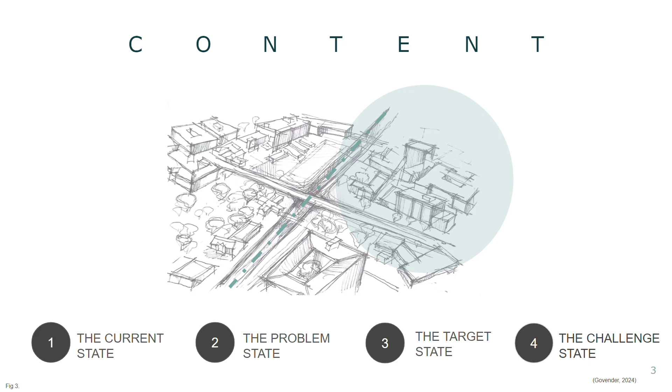The presentation is split into 4 themes, looking at the current state, problem state, target state, and the challenge state. In the current state, we will look into the issues that exist in this mostly privatized Hatfield. Our focus area will be Hatfield, one of the suburbs of Pretoria.

Currently, Hatfield resembles a disconnected concrete desert, where water is heavily privatized and scarce. The Gautrain running through the center facilitates the constant flow of people in and out, connecting Hatfield to Gauteng. However, its full potential remains untapped, leaving Hatfield seasonal with Gautrain's location remaining unoptimized.

In Hatfield, our concept of river of stories encapsulates the diverse narratives stemming from the city's population, rich history, and culture. Here, a multitude of individuals coexist, ranging from students and business people to street vendors and car guards. However, families are notably absent in Hatfield, primarily residing in suburban areas outside the city center.

Access to water is difficult. In the case of a student from Johannesburg coming to Hatfield, water would only be available to them at home or university, with no other public access along their journey.

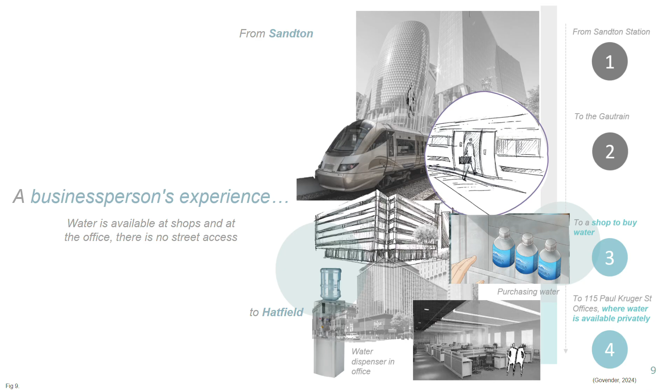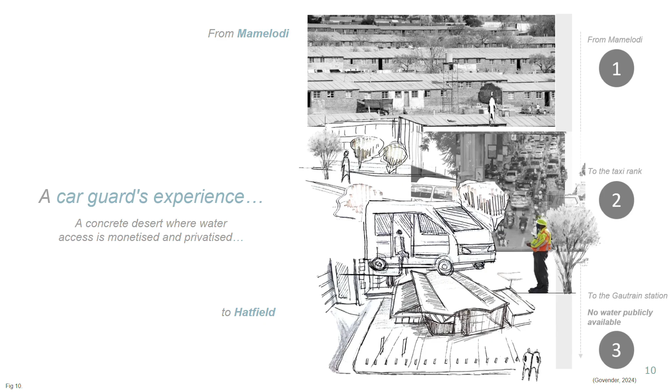Along a business person's commute, water is accessible only in shops or at private offices. From the perspective of a car guard and his journey from Mamelodi to Hatfield, water is not accessible at any point. Hatfield is an urban desert where water access is monetized and privatized.

In its current state, Hatfield is characterized by transportation infrastructure that divides the city, primarily through roads and railways. Lacking pedestrian friendliness, it resembles a concrete jungle and water desert. Our challenge is clear: how can we reshape Hatfield from a fragmented, concrete and water-scarce environment into a sustainable, walkable and interconnected city with water as the central catalyst for transformation?

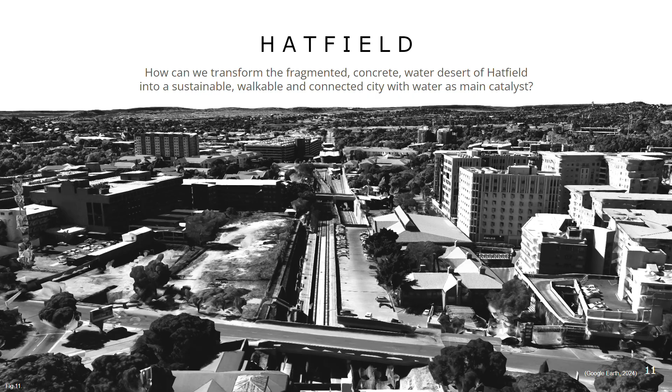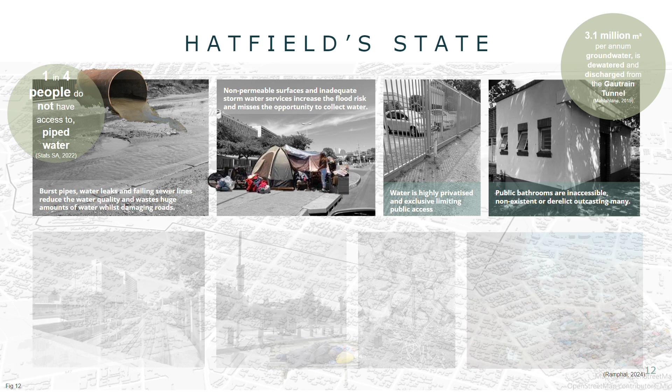In South Africa, 1 in 4 people do not have access to piped water, highlighting the national emergency. In Hatfield, non-permeability and poor maintenance put strain on stormwater systems, whilst water and sanitation spaces are privatized, inaccessible, and exclusive.

Public space does not exist in the site, and a lack of public pride leads to degraded infrastructure and polluted water. Clean municipal water is used excessively for landscaping.

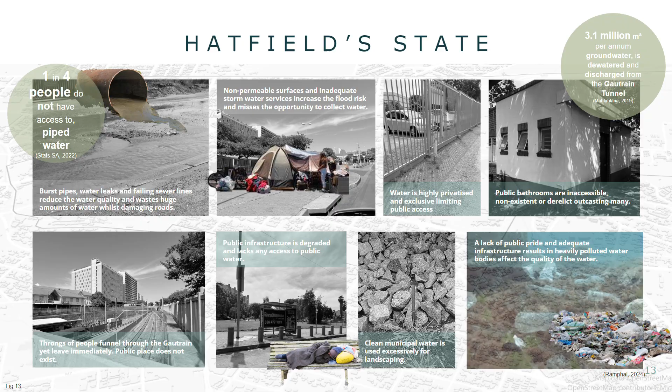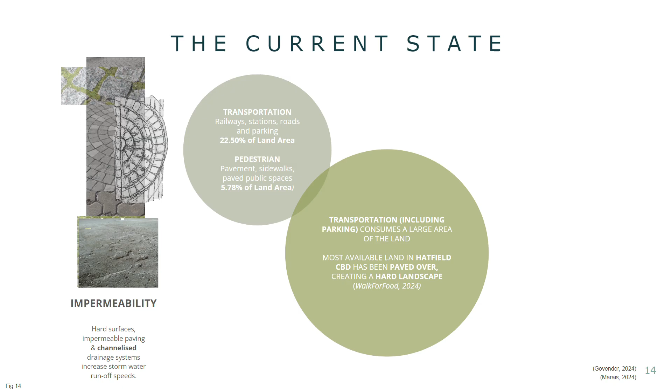In Hatfield, a significant observation is impermeability, characterized by hard surfaces, impermeable paving, and channelized drainage systems that accelerate stormwater runoff. Approximately 22.5% of Hatfield's land area is covered by transportation networks, with an additional 5.78% of hardscaped pedestrian network, totaling in nearly 30% of Hatfield as hardscaped surfaces.

Only 1/3 of all mapped water points were found to be potable. There is no convenient street access to facilities such as drinking fountains and public toilets. Additionally, municipal taps are frequently locked or unusable. This neglect of basic amenities raises concerns about the unmet needs of the general public in Hatfield.

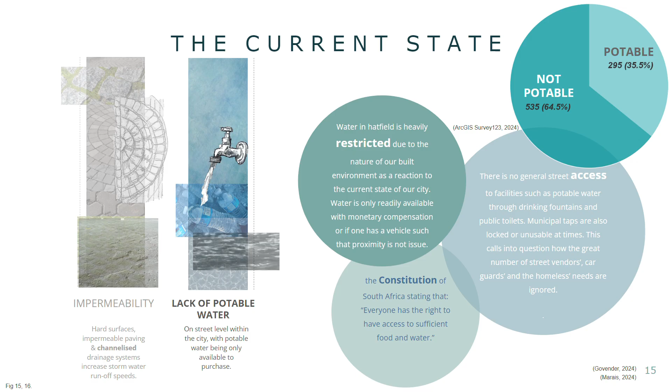Water in the linear industrial system is commodified, losing value as it flows through. Once used, its value declines instantly, as seen from reservoirs to taps or sprinklers.

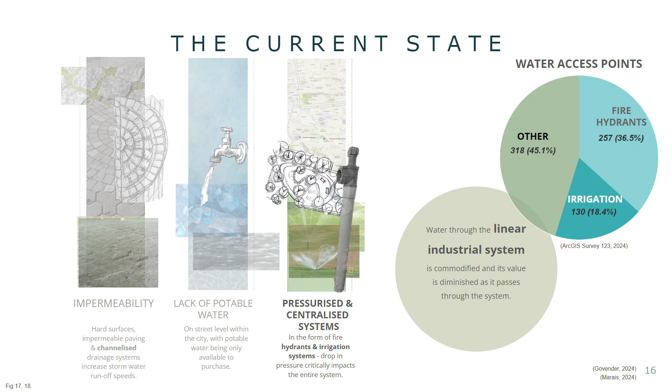Over half of water access points in our data are fire hydrants and irrigation, revealing a lack of prioritization for people's water needs. The lack of accessible water sources has forced reliance on unsafe options like rivers, perpetuating pollution and posing health risks. With 58% of water points being difficult to access and global warming exacerbating demand due to high temperatures, urgent action is needed to address this pressing issue.

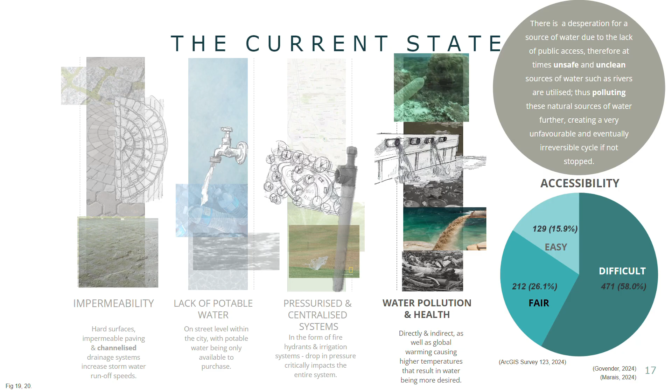Water is a privatized affair, used for own personal demands and desires without much consideration for the system as a whole, as it is only considered by users as it enters, sits on their plots and leaves.

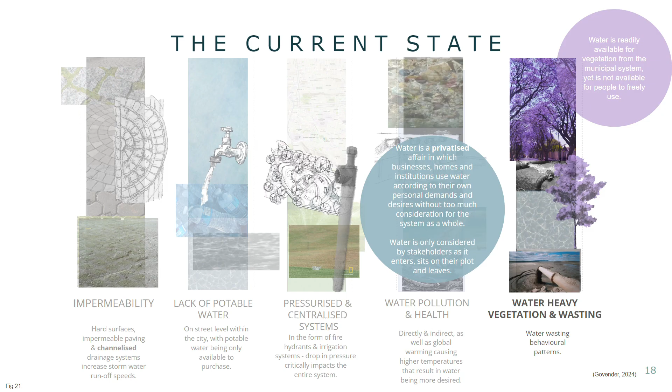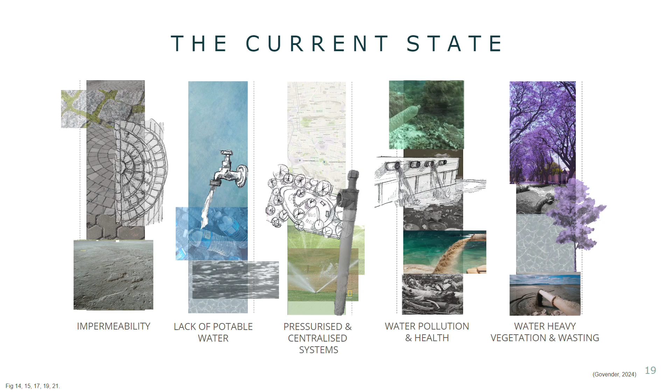Water is readily available for vegetation from the municipal system, yet is not available for the public to use. The issue of water currently reduces the quality of life. Without water, there is nothing. And along with changing climates that make water more scarce, we need to start tackling the problem seriously.

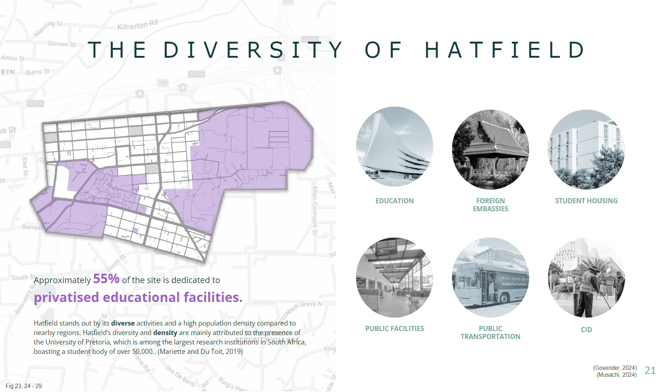The findings of the current state have informed the next section, the problem state. While seemingly diverse, 55% of Hatfield's land is dedicated to privatized educational facilities, meaning without an affiliation to institutions, access to water becomes very difficult.

The University of Pretoria, the Hatfield CID, and residents are committed to creating a better Hatfield. Specifically, the university's commitment to water management is evident in the 2030 Spatial Development Plan.

This is done through initiatives such as harvesting rainwater to reduce municipal reliance and replenishing groundwater for boreholes through sustainable urban drainage systems. Water is also conserved with water-wise gardening and reusing grey water, all of which have a relevance in our intervention.

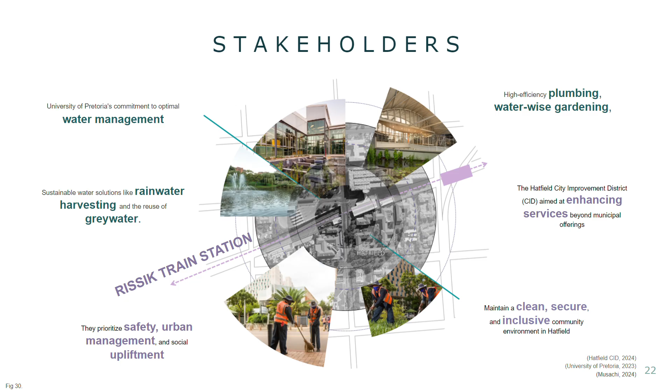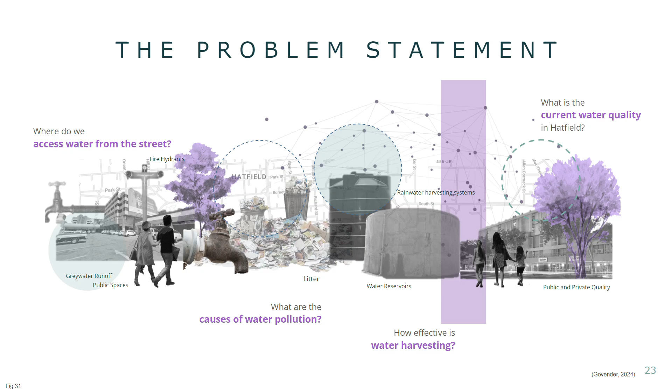An array of questions can now be asked, such as: where do we access water on the street? What are the causes of pollution? How effective is Hatfield's water harvesting? And what is the current state of water quality?

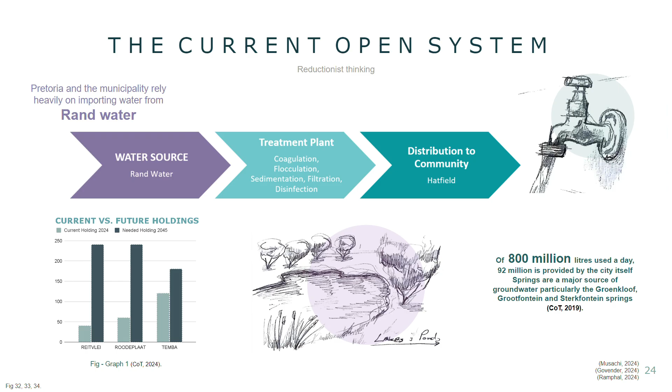The current open-loop system of Hatfield relies heavily on external source, Rand Water, which can be seen as risky seeing how strained groundwater currently is. Of 800 million litres of water used a day, only 92 million come from the city, which is dangerously high dependency. The target state will re-evaluate the current system.

Converting Hatfield from a rock to a sponge creates an optimized closed-loop system that harvests, filters, and utilizes water locally. This allows water to be accessible even during times of water scarcity and creates system safety nets.

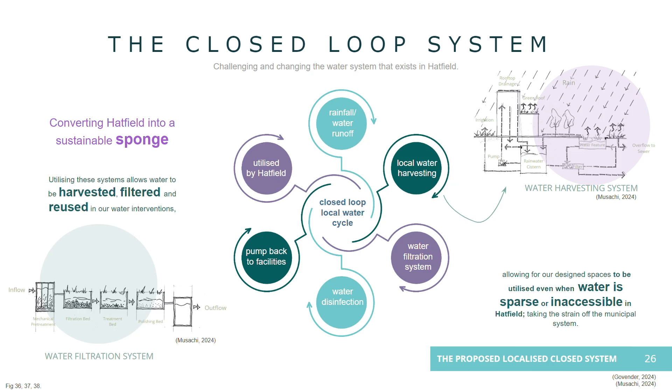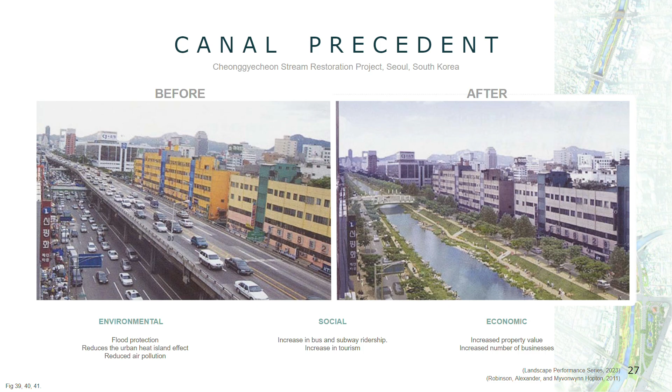Let us look at a precedent we researched in South Korea, proving the substantial positive effects that reintroduction of water can have when implemented effectively into the urban environment. These effects spread from an environmental to a social and to an economic impact, as well as quality of life.

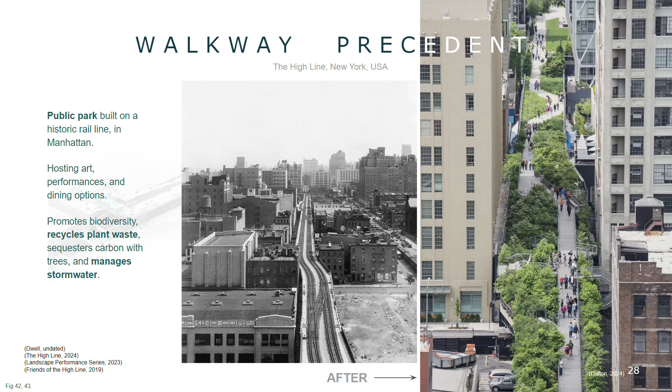This is another precedent in New York, known as the High Line, that introduced a green corridor into the urban context, resulting in profoundly positive outcomes such as increased biodiversity, quality of life, tourism, air quality, and so forth. The space has connected New York across its landscape physically and socially, with various opportunities for art exhibitions, vendor spaces, gardens, and many more facilities utilized throughout.

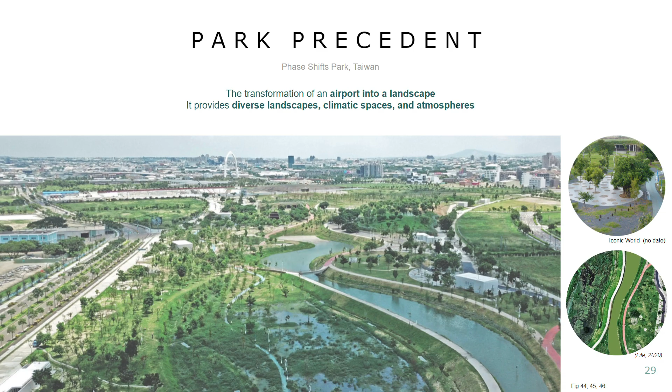This park precedent, the Phase Shifts Park in Taiwan, balances its environmental and design goals seamlessly, celebrating the surrounding environment through various opportunities while incorporating a natural water-centric design.

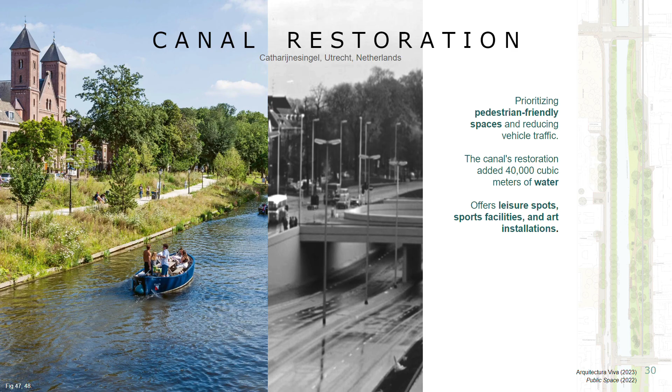Here is a final precedent in Utrecht, restoring a highway into a central canal in the town while prioritizing pedestrian-friendly spaces, increasing biodiversity, and creating recreational areas.

Understanding the current state of Hatfield, we can explore turning Hatfield into a sponge. Incorporating water harvesting, filtration, and storage solutions into streets holds and uses water like a sponge, and can be used as a module that can be inserted into existing infrastructure.

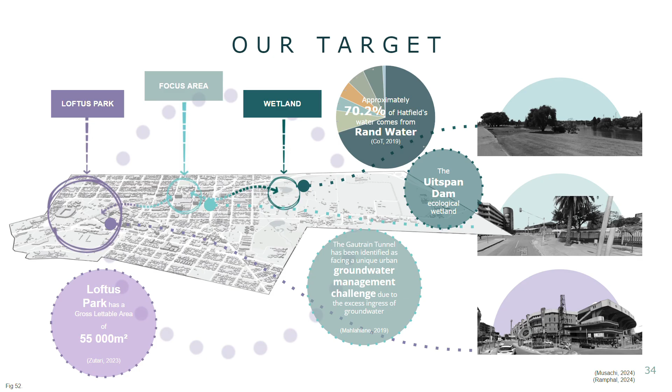Our focus area in Hatfield is chosen aiming to create a sponge in a strategic and central location with as much user exposure as possible. Our target is to pedestrianize Hatfield whilst linking it to the public transportation hub that is Gautrain, and feeding into a bigger connection to the greater Hatfield, from the eastern wetland to Loftus Park, using water as a catalyst, becoming an oasis in the concrete desert.

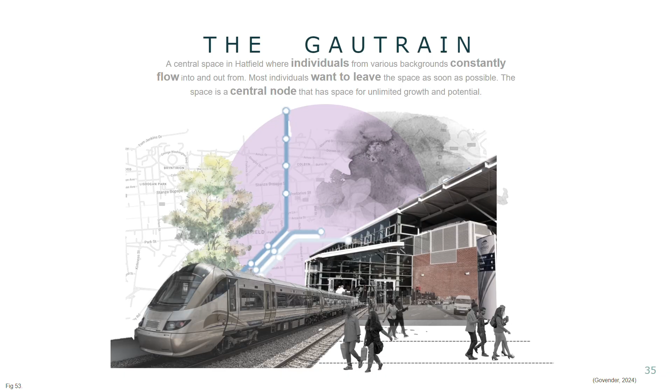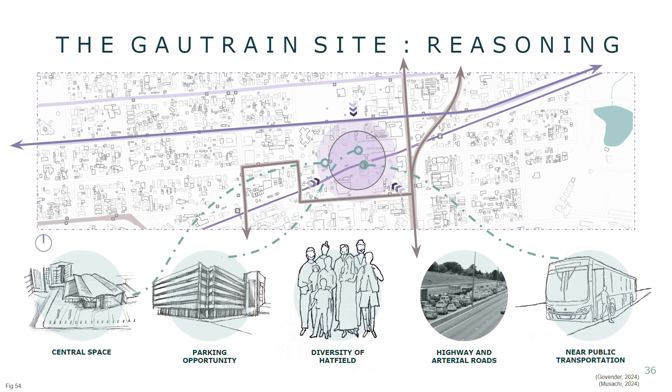The Gautrain is a centralized site with various types of people flowing in and out, but never lingering, in what could be a congregation point for Hatfield, a new town square. We chose the site due to its centrality, parking that provides for the reality of the larger current fabric of Pretoria, and diverse typology of users and its connection to key routes and public transportation.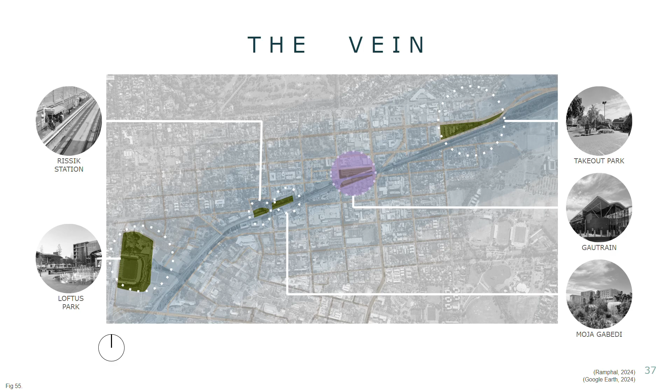The vein is a larger connection, pedestrianizing Hatfield, curated to connect to key nodes from Loftus Park through the focus area of the Gautrain station, dissipating into the Colbyn wetland. This vein would celebrate and center water, harvesting, storing, and making it publicly available.

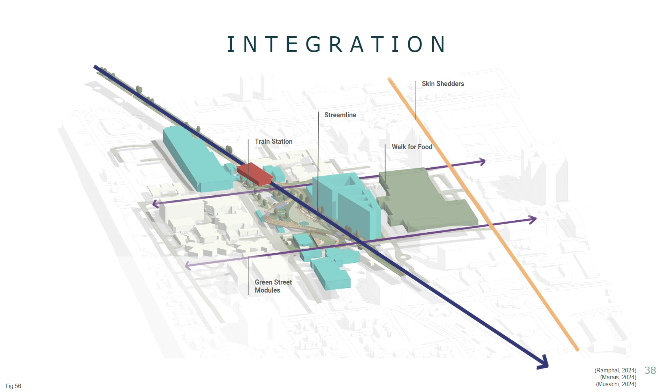Our intervention integrates into the urban fabric of Hatfield and relates to our colleagues from the Food and Construction team, together striving to create the Hatfield Forest.

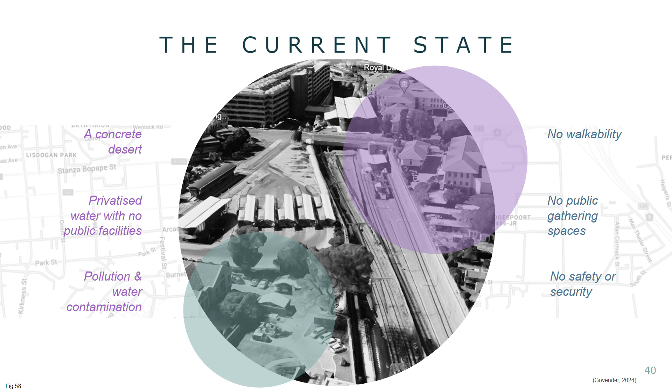Turning to the state of our site connecting into the vein, the site is a concrete desert with heavily privatized water. Pollution and water contamination is also prevalent. The space is hostile, with no gathering space, which exacerbates the safety and security problem.

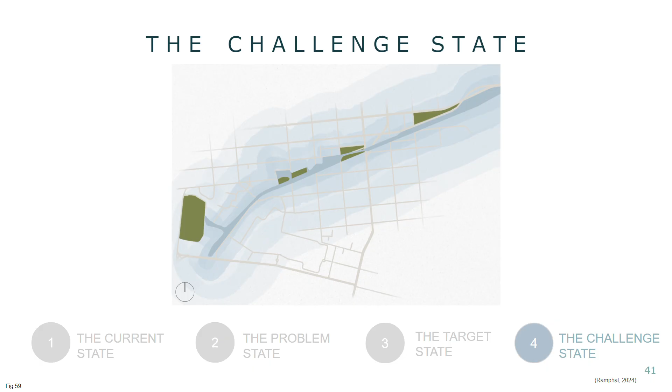Now onto the challenge state that shows our vision and what change can be effected through our intervention in Hatfield. The central space in Hatfield aims to be a peaceful retreat from the city while staying connected to it. It's designed to be a vibrant public oasis for commuters, emphasizing local culture and providing a safe and comfortable environment for daily gatherings.

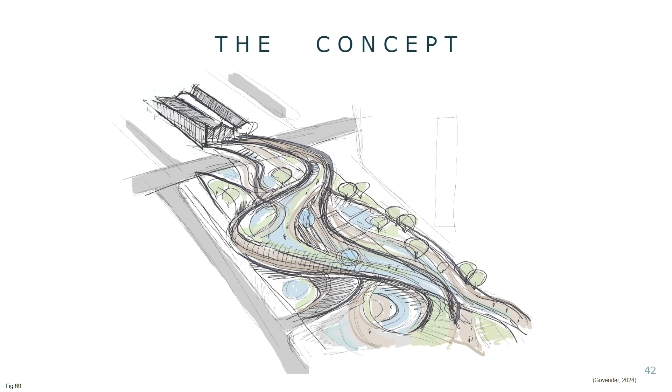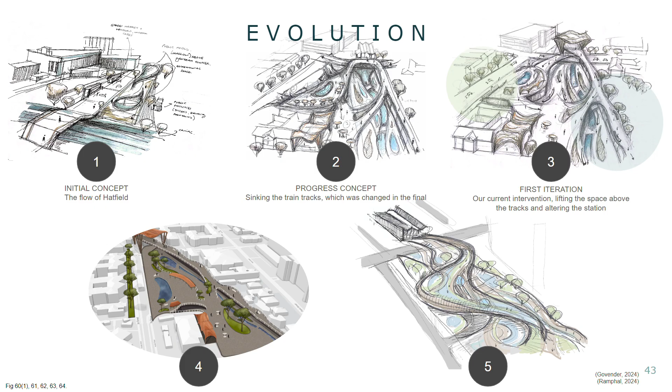The design evolution shifted from geometric to organic forms, and from sinking the tracks to elevating the walkways. It emphasizes a lighter, water-centric structure as opposed to a heavier mass. This is our current urban concrete desert site, and this is what it can become.

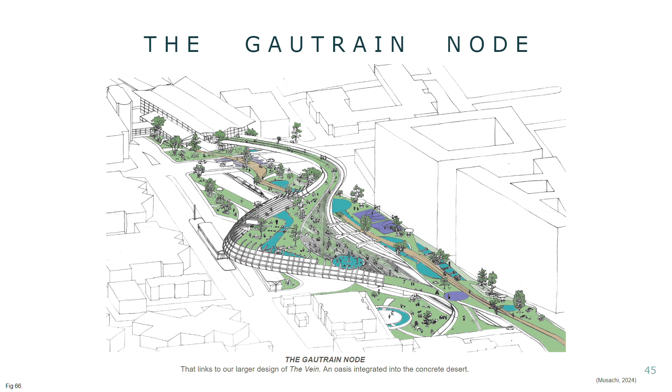The Gautrain node will evolve Hatfield into a sustainable, walkable, and connected city, with water being the main catalyst. It aims to create a unified space, welcoming families, car guards, business professionals, students, residents, and tourists alike, fostering a river of stories. It creates a special sense of place while instilling a circular system.

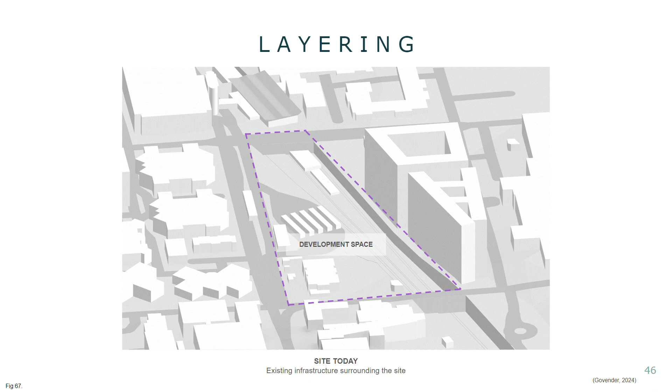The existing site features a few public benches, a bus stop, and the train tracks. The site is well connected to railway lines and roads, providing good site access. A central green space connects to the first wetland node.

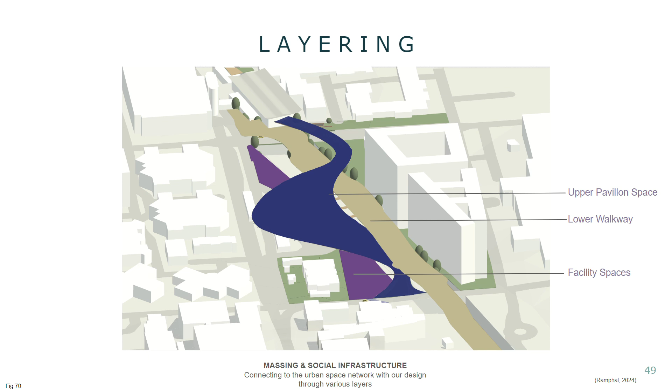Massing and space planning show how the site will be used and how we can connect our intervention to the urban network. The pools and canals of the site collect rainwater and provide a gathering place centering around water as a focal point.

The layout includes the Gautrain station, outdoor market, and pavilion, all connecting to the larger vein from wetland to Loftus. The Gautrain station will gain an extra story linking to the vein via the new outdoor pavilion. The outdoor market, raised above the bus stop, will match the design theme.

The exhibition space will educate on water conservation and host cultural events, adding a tourism element. The node will become pedestrian-friendly with green walkways, water harvesting facilities, and integrated water sources throughout the vein.

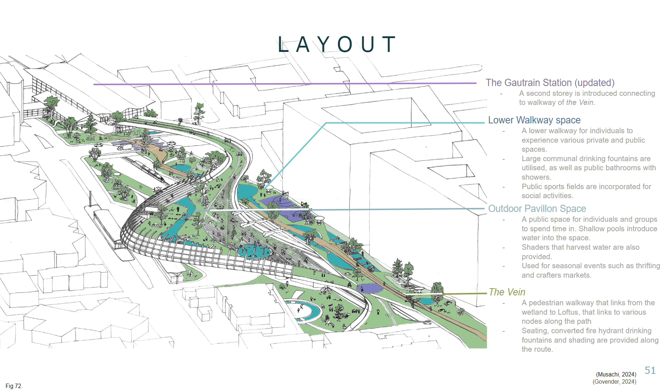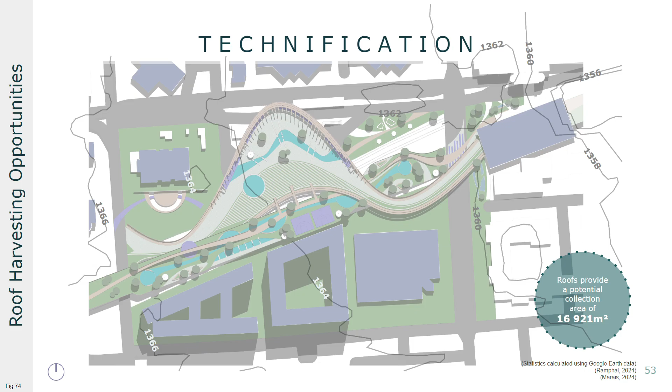The site can be completely transformed by identifying its opportunities. Roof harvesting opportunities provide a potential collection area of close to 17,000 square meters. A 73% reduction in non-permeable surfaces of the site reduces stormwater stress and holds more water on the site, like a sponge.

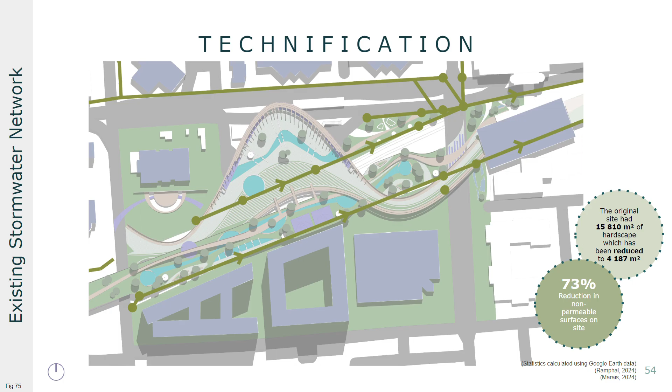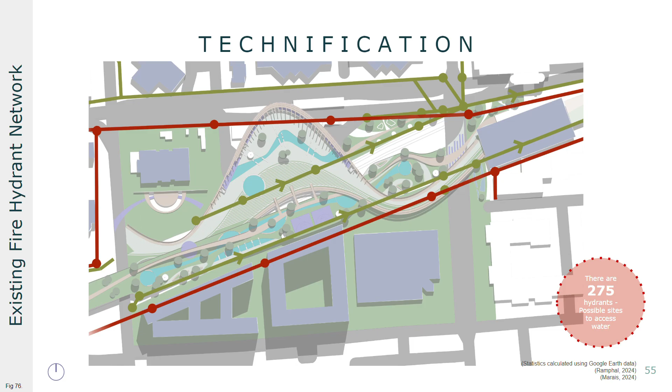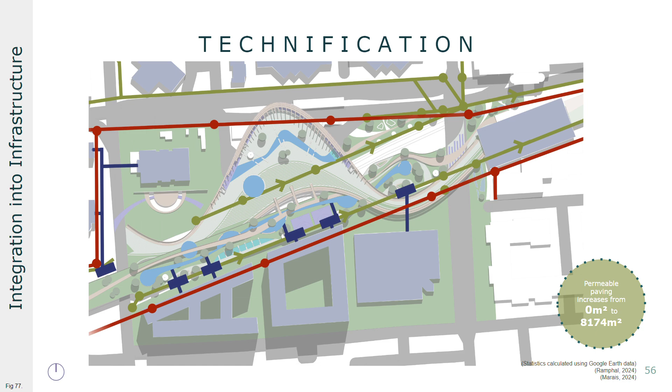The large amount of fire hydrants can be adapted and retrofitted to become accessible water points in the form of public drinking fountains. These interventions, such as increasing permeable paving from 0 square meters to 8,174 square meters, all ensure the collection and retention of water on the site instead of moving it off.

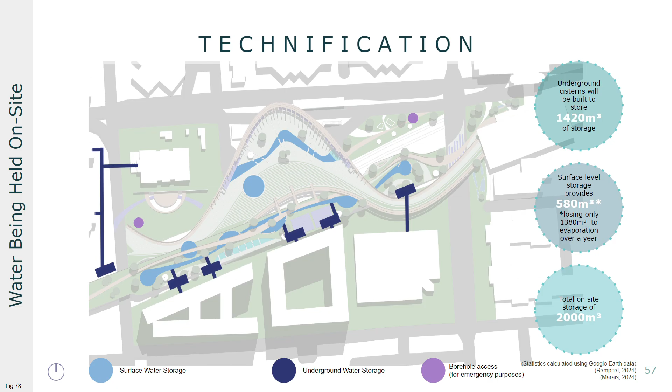The water collected through these interventions will be held and used on-site, with 580 cubic meters stored in public pools and 1,420 cubic meters underground, totaling storage on-site to 2,000 cubic meters.

This slide highlights the technical enhancements in bridge design, incorporating multiple water systems like umbrella catchment, emergency boreholes, bioswales, retention ponds, rain gardens, water systems, and rainwater harvesting. This circulates water on the site and creates a water feedback loop, ensuring the site can manage its own water needs independently.

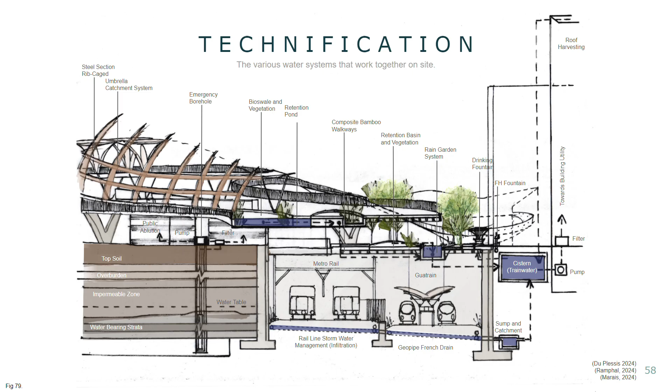Through the sponging effect of our intervention, we will be able to harvest 13,800 cubic meters a year, meeting the water site requirements, whilst also being able to provide for the 8,075 cubic meters of water required by the food group's intervention.

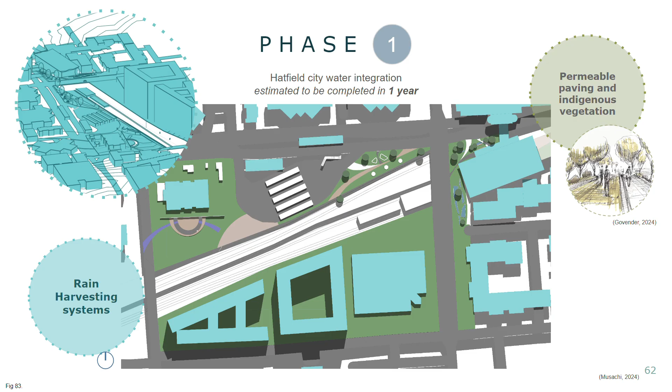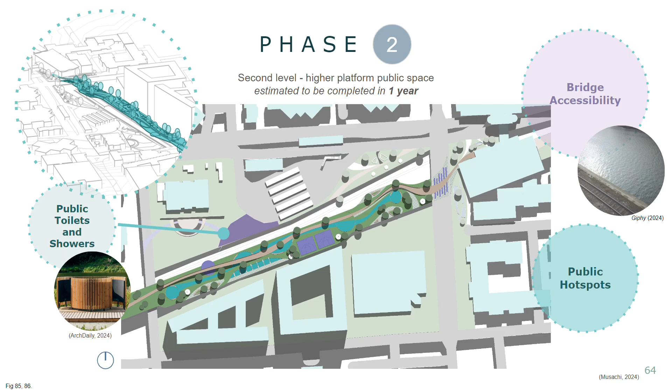Phase 2: Elevated public space on the second level, estimated to be completed in 1 year. Including public toilets and showers, the bridge will also feature accessible routes and public hotspots.

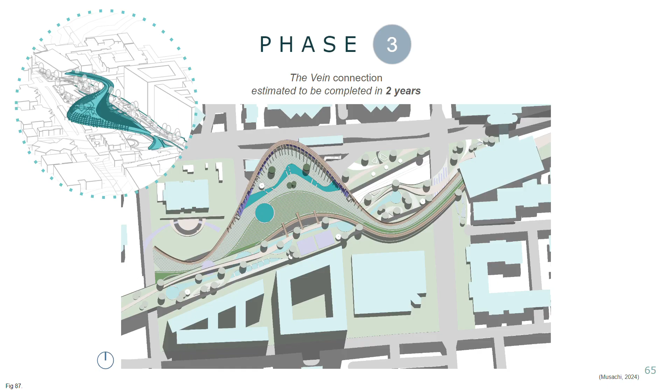Phase 3: The vein connection, estimated to be completed in 2 years. It will include an amphitheater for social gatherings and water features for public enjoyment, becoming the central social hub.

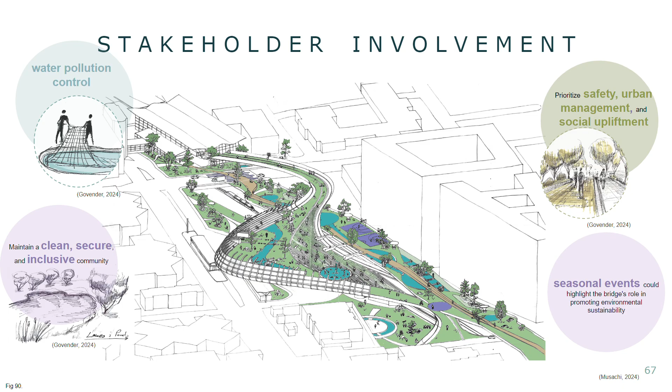The Hatfield CID, the municipality, educational institutions, and local residents play pivotal roles in maintaining and securing the space. Their involvement is key to reducing water pollution, fostering community pride, and organizing seasonal events that highlight the bridge's role to environmental sustainability.

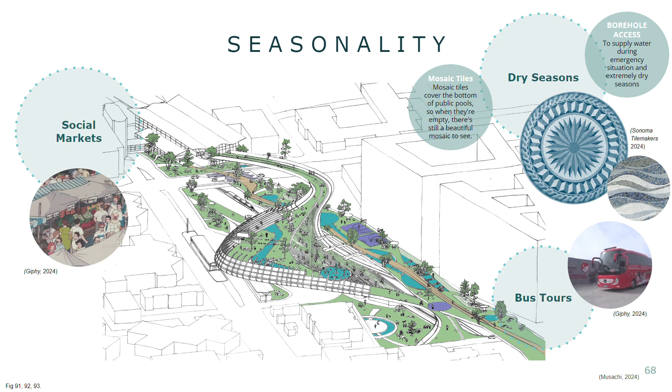Delving into the various moments generated in our intervention, we look at the outdoor social pavilion space for seasonal markets, with water harvesting shaders, pools, drinking fountains, and permeable paving.

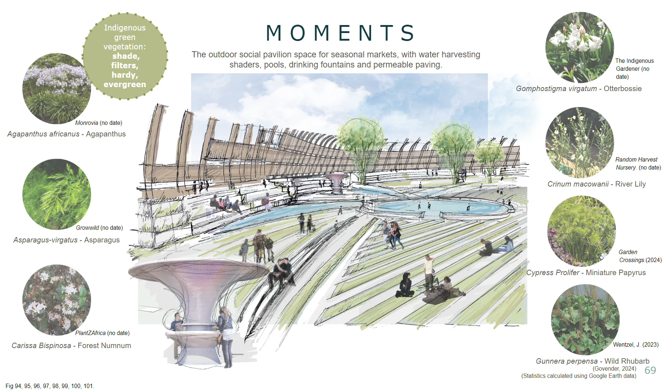We incorporate a palette of low-level and aquatic planting to create a sense of public pride and clean collected rainwater. There will be green spaces that incorporate hardy, indigenous, and water-wise trees that provide shading.

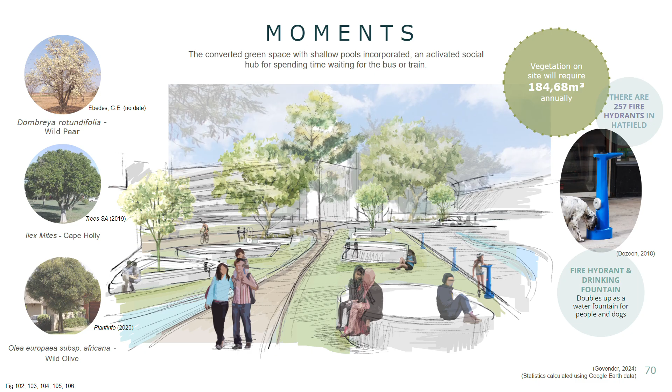Shallow pools are spread across the activated social hub for spending time at while waiting for the bus or train, creating a sense of gathering and comfort. Converted fire hydrant drinking fountains will also be utilized to provide public access to potable water.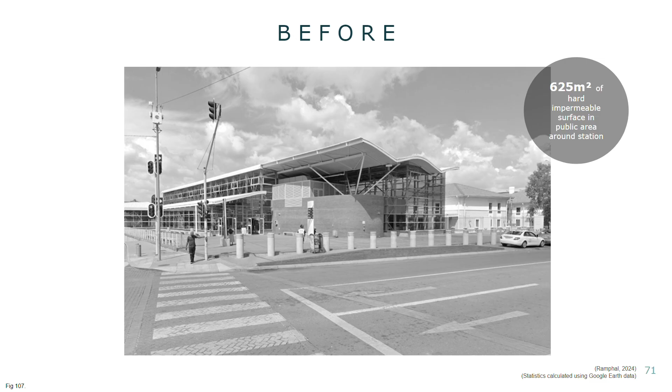The following perspectives illustrate the personal experiences across our intervention. Here is a Gautrain station currently, where 625 square meters of area consist of impermeable surfaces. After our intervention, we have a social green space that introduces the node, with an 85% reduction in impermeable surfaces.

This is the current state of the tracks, with the current storm water runoff at more than 14,500 cubic meters for the site annually.

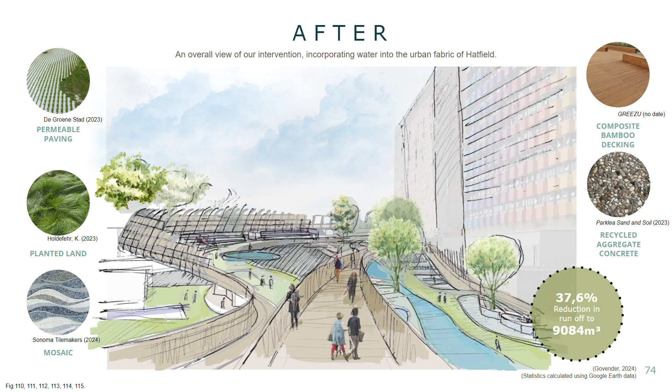After, our intervention incorporates water and pedestrianization into an urban fabric of Hatfield, ensuring the intervention uses a softer, natural material palette, such as composite bamboo decking and recycled aggregate concrete. Runoff is also reduced by 37.6%.

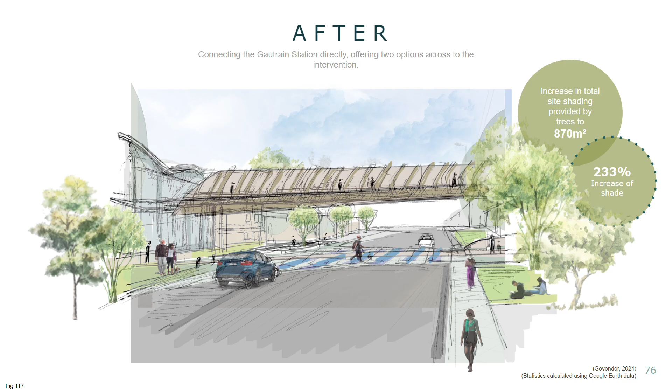Currently, the site is hostile, as it only has 260 square meters of shade. After, our intervention connects to the Gautrain Station directly, offering two options across to our curated space. We increase shading by 233% on site via indigenous, water-wise, and evergreen trees.

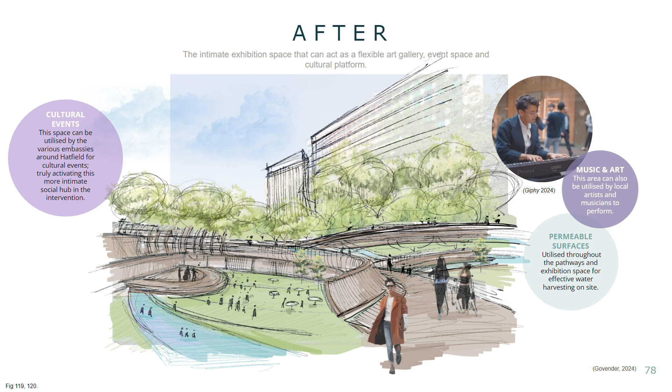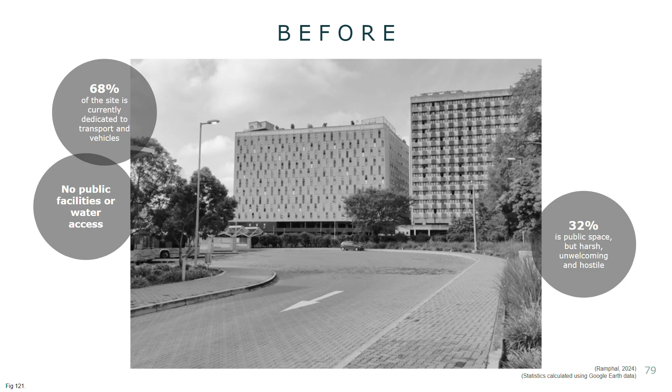Currently, 68% of the site is dedicated to vehicles, with there being no public facilities or water access open to the public. Our intervention brings in self-cleaning facilities open to the public in the space underneath the sky bridge.

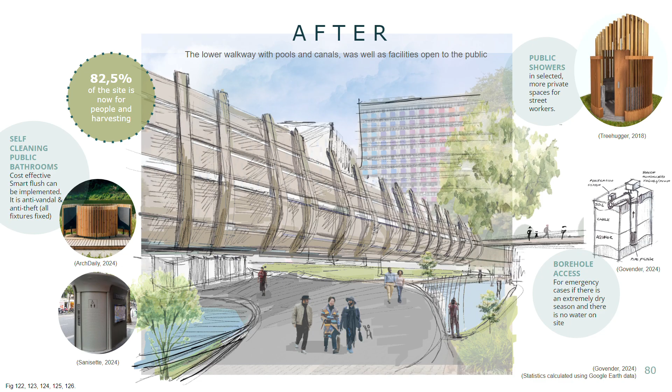82.5% of the site is now dedicated to pedestrians and water harvesting systems, such as the walkway shading and permeable paving. Currently, 0 square meters of the Hatfield track is walkway space for pedestrians, being a void in Hatfield's public realm.

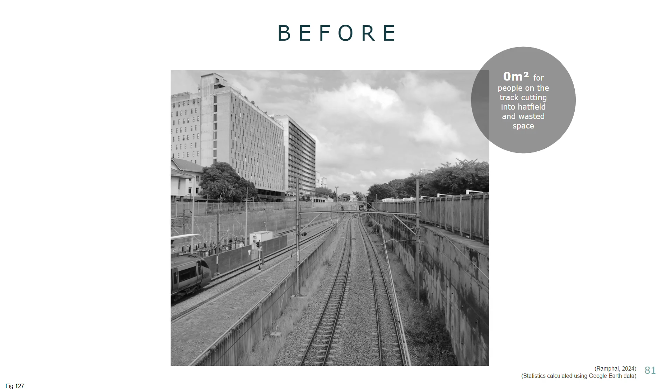When we tap into the potential of this track, the Skywalk, a dynamic blend of social spaces and viewpoints, transforms 85% of the area above the railway into valuable usable space, featuring communal drinking fountains to foster social interaction and provide refreshment along public shallow pools.

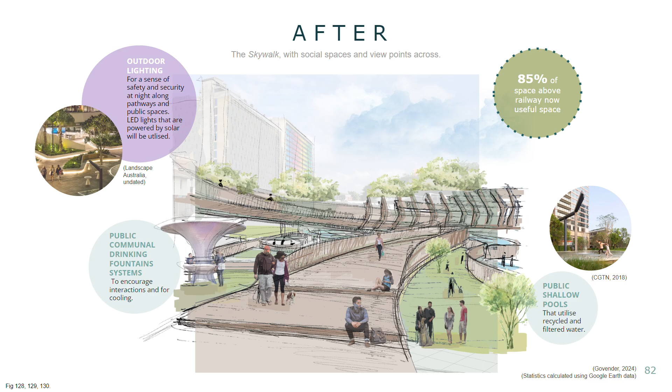LED solar-powered lighting outdoors will be utilized to accommodate a sense of safety and security for individuals at night. The current site is a hard, hostile, and unwelcoming space.

Integrating water into Hatfield's urban landscape transforms it into a living sponge accessible to everyone, where water enters and no water leaves. Our biomimic canopy not only mimics the fluidity and essence of water through contemporary design, but also functions to collect and recycle rainwater.

Pollution is addressed with efficient litter nets and grating. Additionally, borehole access ensures water availability even during water-scarce times, safeguarding the community's needs.

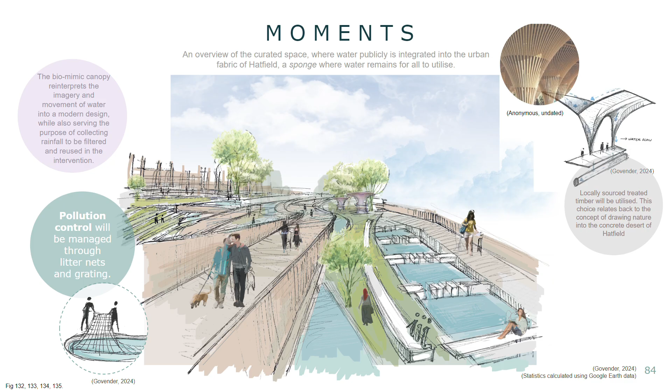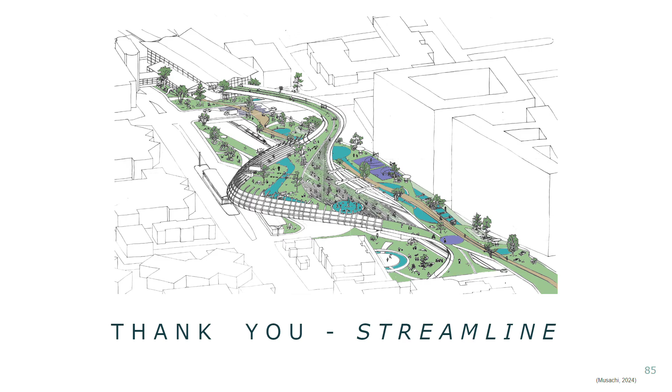Our intervention unifies the needs of a community, circular systems, and natural aesthetics to create a place in Hatfield that individuals can feel proud of. By creating spaces like these, we begin to make places that will sustain us into a more positive, ecological, and innovative future city. Thank you.